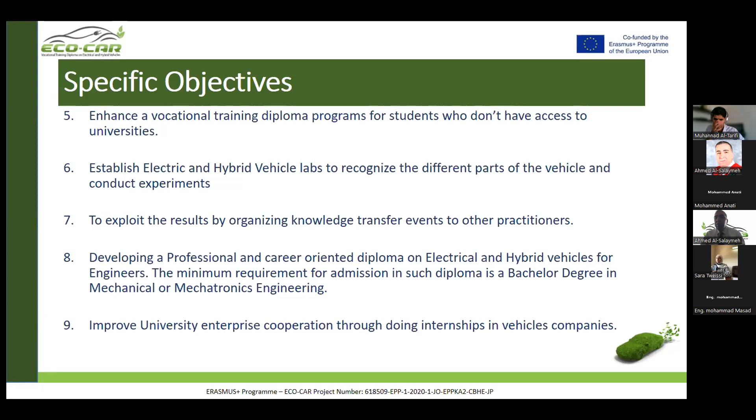In addition, that will also enhance vocational training diploma programs, especially for the students who do not have access to enter the university, which is diploma al-mihani. Also, we will exploit the results by organizing many workshops. This is knowledge transfer, and we'll also improve university-enterprise cooperation through many internships in electric car companies.

Some indicators: I think that this summer we'll have 8 diplomas established at 8 universities in Jordan, courses integrated in the study programs, and many workshops conducted. Also we'll receive feedback from the students, and a regional and international network will be established.

Next month we'll have the first training workshop in Europe within the capacity building, and the students who enroll in the program will also have the chance to get training in Europe. We'll also have the training centers, the lab at each university, and we have a website. Currently we are working on the course material, and an e-learning platform will be launched soon.

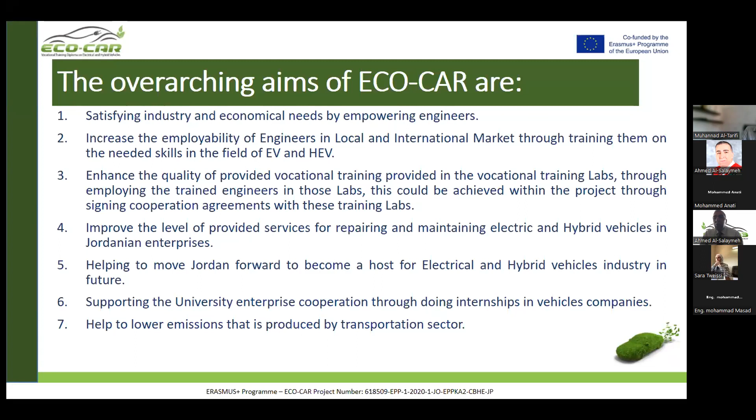These are some objectives that we want in general: to enhance the teaching, the capacities, the programs in the field of electric and hybrid cars. This will also have environmental dimensions, since it will lower emissions and aim to reduce greenhouse gas emissions, and this will help Jordan to become a hub for electric and hybrid car factories and industry.

About what we have till now: some universities will have a professional diploma, others will have a vocational diploma, and some universities, especially Al-Balqa and Al-Hussein or Al-Tafile, will have a community college diploma. We have the different work packages, such as the network, and the first one was establishing university-enterprise cooperation. We already started with this work package, and this will continue till the end of the project.

And now we already have the network, with about 75 registered members from Jordan and about 13 registered members from Europe. This is the template to join the ECO-CAR network. Any company can join this network. Before we prepared the curriculum or the courses, we did a baseline study with many surveys for students, staff, and stakeholders, and we analyzed them, and the results were the base for our curriculum.

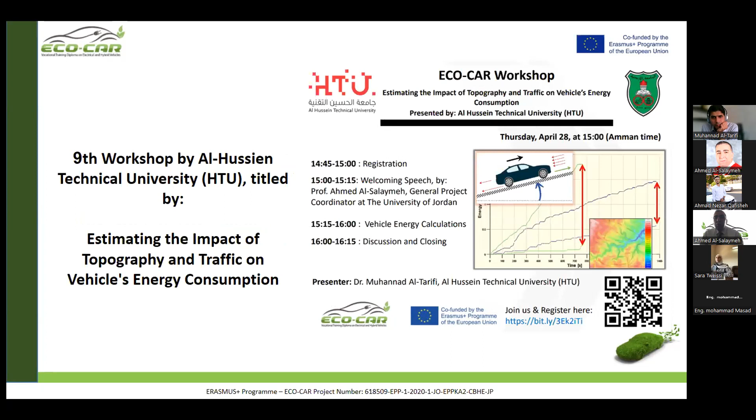And today we have this workshop from Al-Hussein Technical University about the impact of topography and traffic on vehicles' energy consumption. We hope that next month other universities will give more training workshops. About the labs, soon each university will have electric and hybrid labs, and hopefully there will be an official opening for these labs.

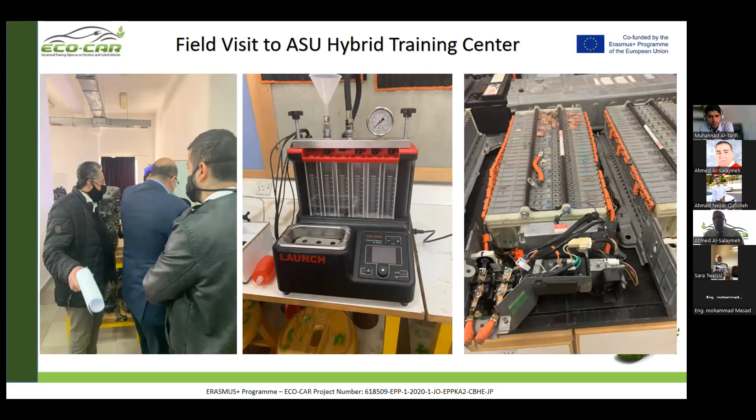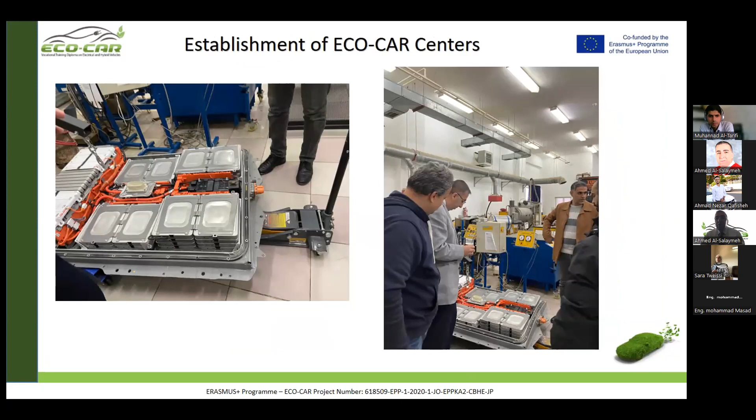This is an example of the electric and hybrid labs available at Applied Science University, from our visit. This is also an example of our visits to electric companies that have electric cars in Jordan. We try to strengthen this cooperation with the electric companies.

Yeah, this is about the new devices which already started to arrive to the universities, and we hope that within 2 months all equipment will be available in Jordanian universities. And currently we are preparing the courses. The course material will be ready by the end of this month or next month.

And yeah, we'll have the platform to host this course material. We also want to have a certain quality in the projects, and therefore we'll have continuous monitoring for the implementation of the projects. Yeah, dissemination is very important, and therefore we have many activities within dissemination.

We'll have newsletters; if you have your email with us, you will receive the newsletter about the projects, and the website and other social media. For the management, the project is coordinated by the University of Jordan. This is the project website, you can visit it. This is also the Facebook page, and this is the YouTube channel where we have some videos about the projects. So this is in brief about the ECO-CAR projects.

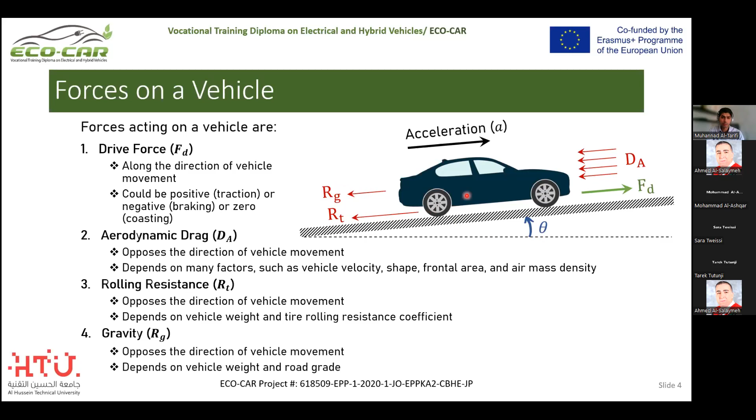What affects this equation is everything related to all of those parameters. The gravitational acceleration is constant. Now the mass or the weight of the vehicle will make a huge effect. The drive cycle, which is the velocity, will make a huge effect, and all of these things related to the aerodynamic drag will affect it as well. These are different things that car manufacturers compete to reduce, so they can increase the energy efficiency for a specific cycle.

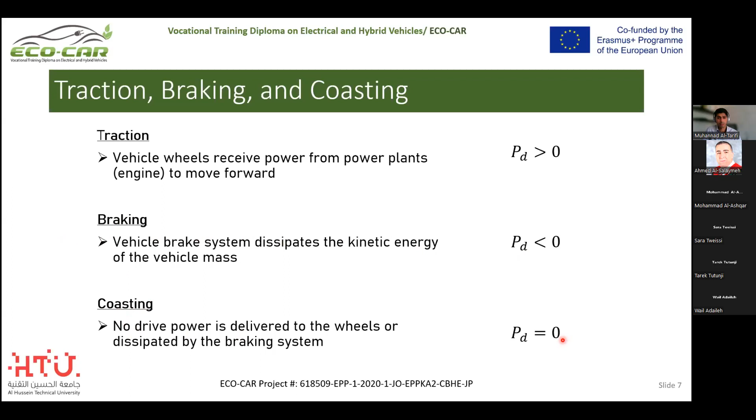And if from that equation the power is negative, then we are applying the brake, which means that we are reducing the acceleration of the vehicle by absorbing some of the kinetic energy through the brakes, which mostly goes to heat for conventional vehicles. And coasting means that the power is zero. We are just not pressing anything on the acceleration pedal.

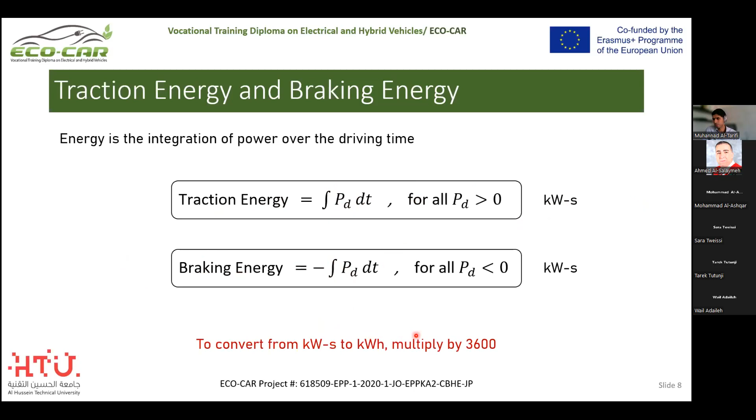The energy is the integration of the power. So in the first case, we integrate the traction power and get the traction energy, positive. If the driving power is negative, we integrate it and multiply it by another negative, so we end up with a braking energy that is positive. We know the flow of each energy in kilowatt seconds. So if we want to transfer it to kilowatt hours, we just divide it by 3600. We'll end up with kilowatt hours.

Now, for the computational modeling, I prefer MATLAB myself, but you can do it anywhere you want to solve that differential equation. I also like to solve it numerically rather than analytically, so I'm using vectors for that. The model is using two inputs. The vehicle specifications related to mass, tire resistance, aerodynamic drag coefficient, and the frontal area of the vehicle. These are inputs from the car manufacturer. You can search that in the spreadsheets from the manufacturer or from people who research that.

And then you have velocity versus time, which we call a drive cycle. It's either standardized or measured. Everyone who goes on a trip from point A to point B has his own unique drive cycle. So that will be the input to the system. We compute the driving power. If the driving power is positive, we proceed and compute the traction energy. And if at a specific point the driving power is negative, we calculate braking energy.

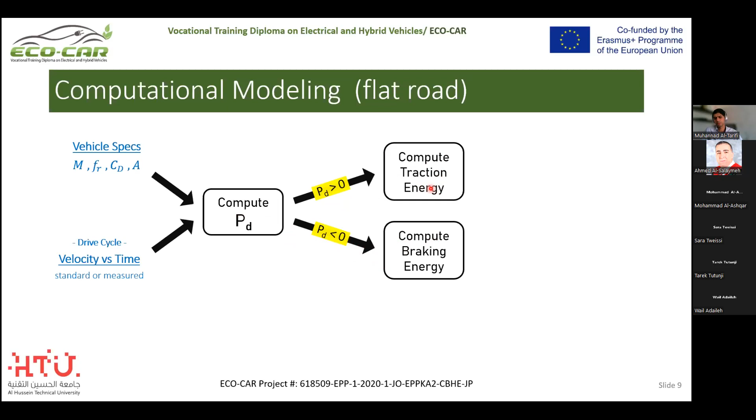Of course, you accumulate that. For every step, you accumulate the traction energy and the braking energy as well. After the cycle ends, you end up with a total traction energy, which is the last point, and a total braking energy, in kilowatt hours. I will keep that unit throughout the presentation. That gives you the total energy, maybe the difference between them, or only the traction energy. The traction energy is something we consume anyway. The braking energy might be lost if you don't have regenerative braking, like in hybrid and electric vehicles. But in conventional vehicles, we lose it as heat.

For fair assessment, we calculate that per kilometer. So we integrate the velocity to get the overall travel distance, and divide the consumed energy, either the traction energy or the traction energy minus the braking energy, by the travel distance. We end up with kilowatt hours per kilometer, and that's a universal unit that car manufacturers publish to brag about their efficiencies.

So to test that, we applied that to a very well-known cycle, the Worldwide Harmonized Light Vehicle Test Procedure. It's basically just speed versus time, and it's standardized. So people, when they test their cars, usually they use the dynamometers to apply this speed and then measure the efficiency out of that. I'm doing everything computationally, so I'm not doing anything practical here, but I'm trying to compare with practical results at the end.

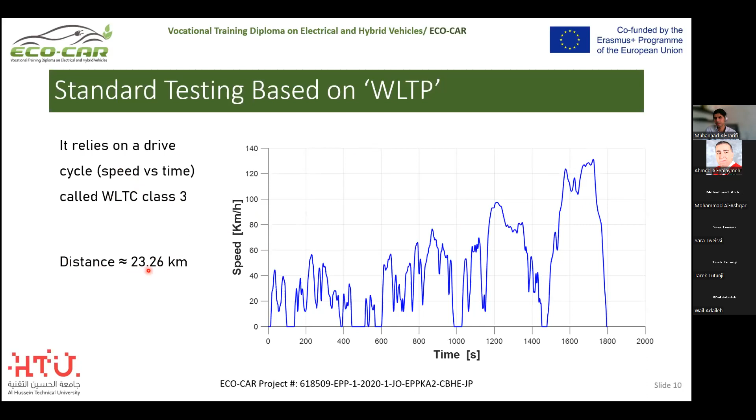Now, if you calculate the force, calculate the power, integrate, and find the energies, the traction energy and the braking energy, you end up with these curves. What we care about here is the last point. By the way, I used the Toyota Corolla 2021 parameters, took them from the internet. And then you'll find that the traction energy is 3.4. Of course, I chose the conventional vehicle, so I will not have any use for the braking energy to save something back somewhere.

So easily you can find that energy consumption will be the final consumed traction energy divided by the travel distance, which is 0.146 kilowatt hours per kilometer, which is fantastic when you calculate that. But that is not the real energy that you consume. That's only the kinetic energy that could reach the road. Actually, on the way to reach the road, you lose about 75%. You deliver only 25% to the road. So this is only 25% of the actual energy that is consumed.

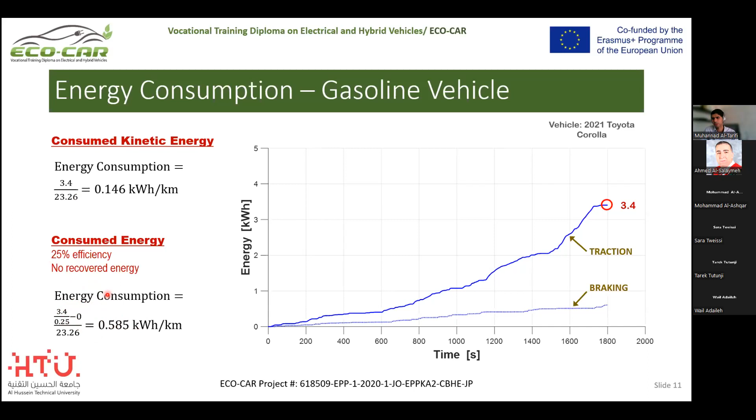So we don't have any recovered energy, as I said, and car efficiency itself, on average, they always publish it as 15 to 35%. The average is 25%. So you divide by 25% to see what energy you apply before the engine, before everything. So you'll end up with 0.585, let's say 0.6 kilowatt hours per kilometer. And that's what makes the conventional vehicles a little bit less efficient than electric vehicles.

So if you calculate based on traction energy, assuming you don't have any regen in braking, you'll end up with 0.168 kilowatt hour per kilometer, which is actually higher consumption than the Toyota Corolla, purely due to mass. Well, there is some difference also in the aerodynamic drag coefficient as well, in the favor of Tesla, but Tesla is way heavier. So that's why it will consume more energy.

And then the difference happens when you actually trace back to the battery. Actually, you don't lose much going from the battery to the road. The average is 90%. It could be lower, it could be higher. I took the average, so 90% efficiency. So we divide the traction energy by 0.9 to get what energy actually left the battery.

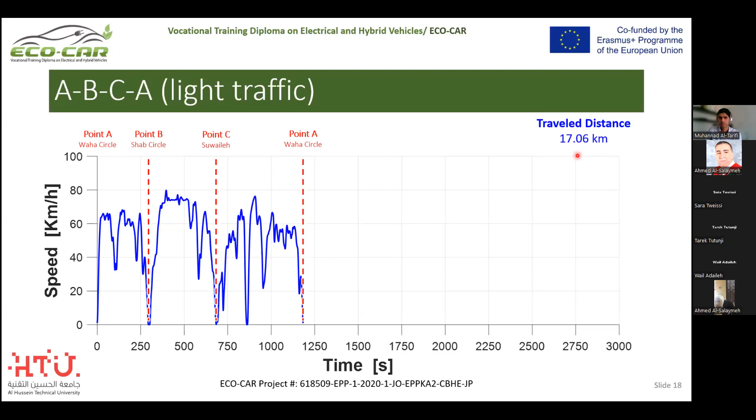Okay, the travel distance for that cycle is 17.06 kilometers. Applying that to the computational model, you have 2.4 kilowatt hour consumed as traction energy and 0.46 kilowatt hour consumed as braking energy.

You can see that braking energy is less than 20% of the traction energy as a percentage, which means it's light traffic. Applying the same equation with 90% drivetrain efficiency and 70% of braking energy recovered, you end up with this energy efficiency number. I'm using the same numbers as Tesla, though I didn't drive a Tesla, I used my own car, but the drive cycle applies. When applied to Tesla computationally, you get 0.14 kilowatt-hours per kilometer, which is actually lower than the EPA results. Again, this is very light traffic.

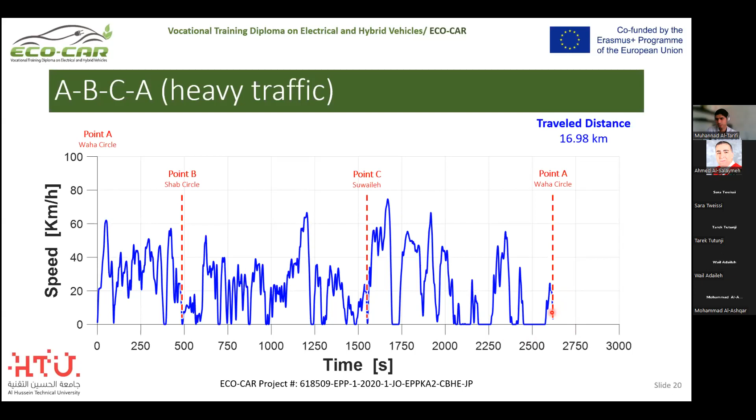Now, if I did the same study with the same points A, B, C, A, but during peak hours, this changes. I have point A, point B, point C, point A again. The average speed is below 40, actually even below 30, not like the other case where the average speed was about 45 to 50. This one is about 30 or less, even though these are the same paths, same points, same driver, me. So you can see I took way more time, actually twice or 2.5 times the time it took with light traffic.

Now there's a major point here: you don't really recover too much braking energy at very low speeds. So I'll be generous and give 50% instead of 70% for the braking energy recovered. That assumption of 70% is wrong here, even though the result is higher than the 0.14 we got with light traffic, it's still even higher than that.

So just by changing the recovered braking energy percentage to 50%, you end up with 0.16. Comparing 0.16 to 0.14 or 0.145 or whatever, you get about 10 to 15% increase in energy consumption overall due to traffic. So that's the conclusion: heavy traffic can contribute to an increase in energy consumption of up to 10 to 15%.

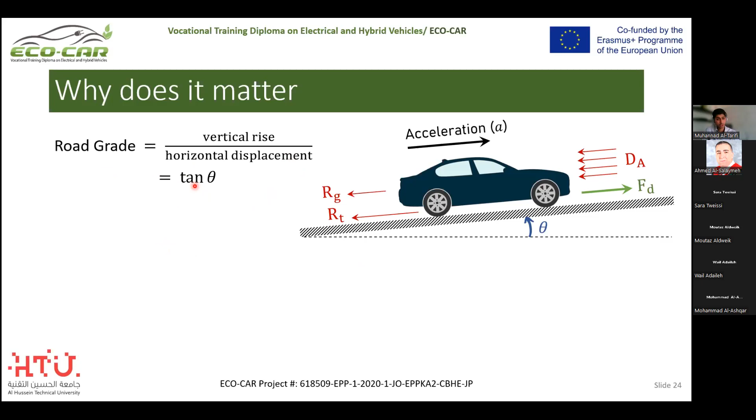Now things will change here because I'm actually putting road grade within my study. Road grade is usually defined as tan theta, but at low road angles, tan theta is approximately equal to theta, which is also approximately equal to sine theta, within about 1-2% maximum error.

This is what I was talking about—we have a term for the gravity effect. The gravity effect is related to the acceleration of gravity, the mass, and of course the road grade. So now I'm including that in my studies.

Probably I should make some animations here, but okay—I'm doing a comparative study to see the effect of positive grades and negative grades compared to flat roads. Positive grade means inclined upwards, theta is positive, which you can also hear referred to as rising roads or ascent, the ascending road.

The other way around, negative road can also be represented as an inclined road, or falling road, or descent. The cycle I'm applying everything to is the FTP 75, and the blue here represents the flat road, 0% grade, so theta is tan inverse of 0, which is 0. That's the flat road, which we studied before, and it was 0.147 kilowatt hour per kilometer, the energy consumption based on a Tesla car and that drive cycle.

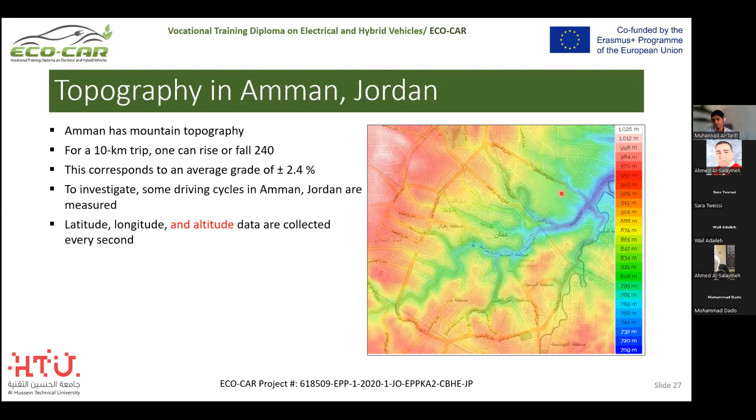So I collected some driving cycles using the same app. Latitude, longitude, and altitude data are collected each second. And now we have two cycles: the speed cycles, which I showed before, and now the grade cycles.

To avoid non-realistic scenarios, you can't just go from point A to point B and say you saved energy. You have to go back to the same point, same altitude. Whatever rise and fall happens within the way is within the way, but the starting point and last point should have the same altitude. I chose to have them be the same point, but for fair comparison or study of the effect of road grade, you have to start and finish with the same altitude.

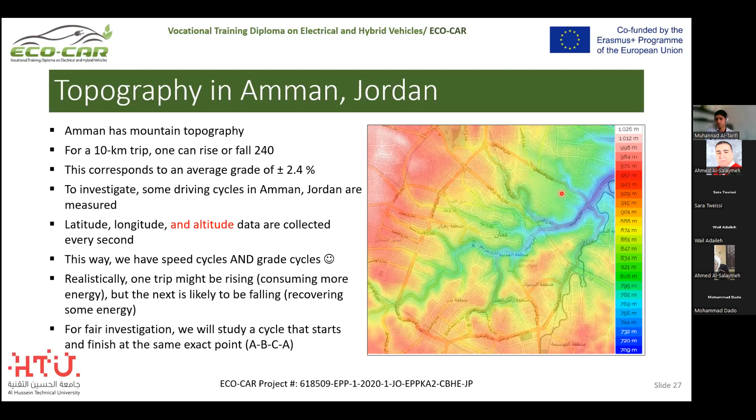I use the same trips. I purposefully did these testings for A, B, C, and back to A, with the idea that point A to point A through that cycle would be fair enough for road grade investigation as well. For the light traffic case, remember we have two cases. The road grade was going up and down, up and down. The last one here was positive. Sweileh is somewhere here, I think.

So the average - I'm not showing RMS values, I'm actually showing absolute values of grade, but I'm then calculating the RMS value of it. The grade is varying. It reaches sometimes above 3% or 4%, sometimes less than 2%, minus 2%, most of the time in between.

Within the computational model, the positive effect will be totally different than the negative effect. To understand how much this variation means, I'm showing an RMS value of about 2.15% for that trip. The energy consumption calculation, based on 90% drivetrain efficiency and 70% recovered from braking energy, gives about 0.174 kilowatt hour per kilometer, which is about a 20% increase compared to the flat road. So it does affect consumption even if you start and finish with the same altitude.

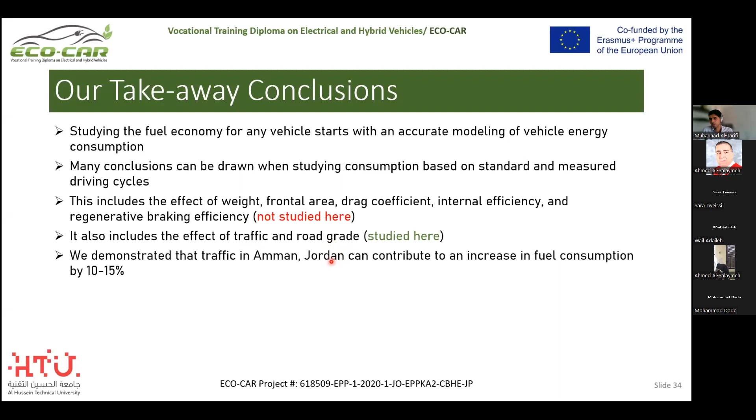All of this is not studied here, but you can actually include them in the computational model and do the comparative studies. In this study, we did see the effect of traffic, which affects the drive cycle on a flat road, and then road grade, which shows the effect specifically for Amman, Jordan with realistic or measured results. We demonstrated that traffic can contribute up to a 10 to 15% increase in energy consumption, and road grade might contribute a similar number, 10 to about 20% energy consumption.

More data can be collected. Accuracy of collecting the data might be an important factor here as well, because GPS data are not always stable, especially for small distances, collecting data every 1 second and all that. Now, if you want to go to another city, you can make a different study. You collect new data for that city because the habit of driving in that city, the topography of that city, and all of that are different. So you can repeat that.

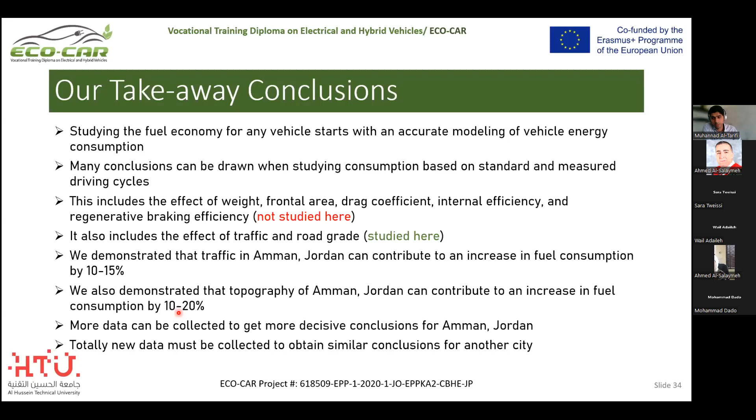Conclusions might end up being about similar, but for accurate conclusions, especially if we are talking about transportation systems, let's say buses, let's say trucks, that might be a big deal. That has to be done for every city by itself.

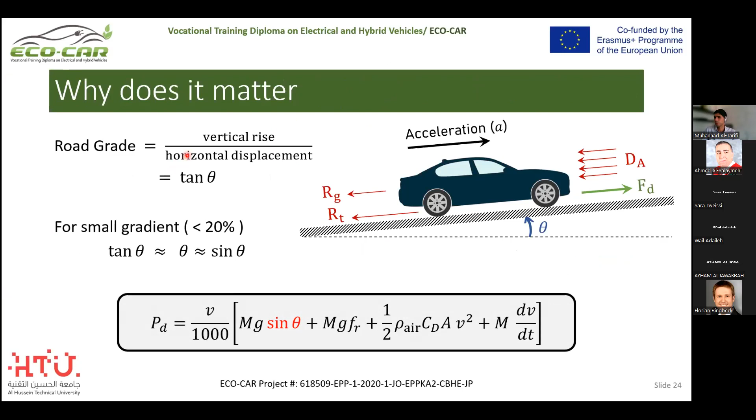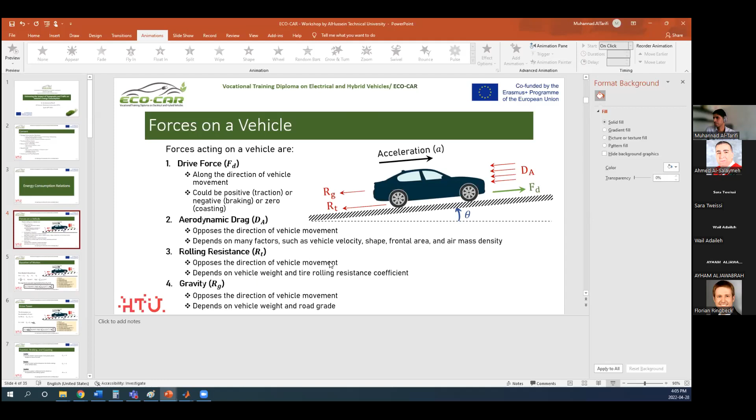Okay, that's good. The first question is regarding the tire rolling resistance. You use a constant friction factor for the rolling resistance. As you know, there are other tire models, non-linear models like the brush tire model or the magic formula. Did you have the chance to check these non-linear models and see the effect in your model? Does it affect the result much or not? Yeah, you are right. It's a constant. The effect of the rolling resistance will be huge, especially for light traffic, because it is a constant applied all over, regardless of the speed. So I agree with you, but I didn't do that study.

I see. The second question is also about the rolling resistance, just to make sure you are focusing on low grades, because I was expecting to see this term multiplied by cosine theta. Do you assume it's 1 because you have low grades? Yes. I'm not including the grade in the tire resistance term. Okay.

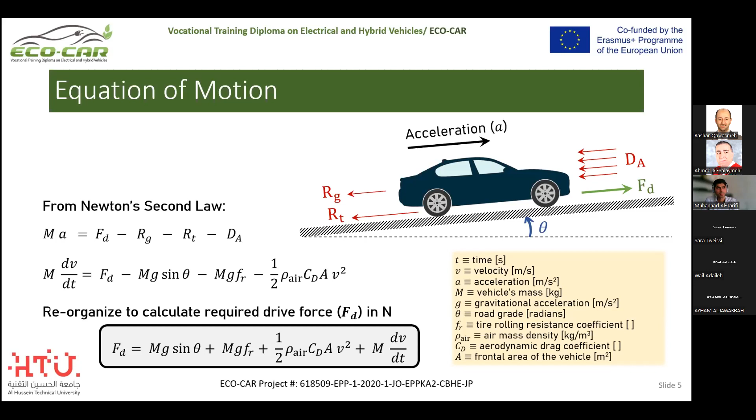It's nice that you consider taking the grade or the road grade as one of the parameters. But my question was, why just the plus and minus 2% grade levels? Why didn't you consider more grade levels? And my second question, you mentioned something about small angles, theta, and the sine theta. Did you do this in order to get a linearized model?

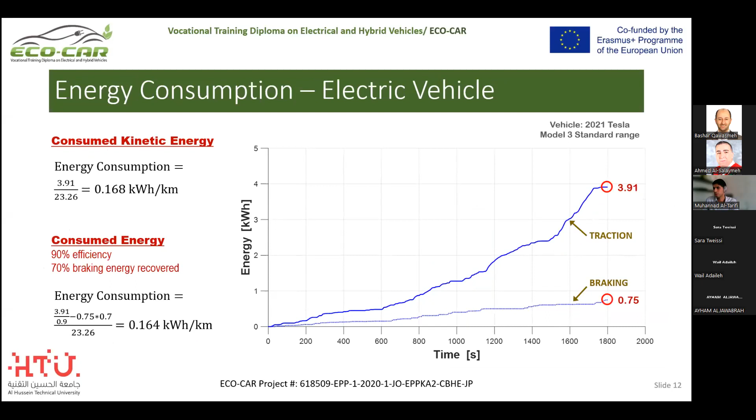Okay, well, answering the first question, I didn't consider it just because my purpose was just to demonstrate that the effect of the grade, even for small grades, is huge. The trend is there, so a higher grade will mean huge energy consumption in the rising case, and probably zero energy consumption, maybe only collecting braking energy, if it is falling all the time.

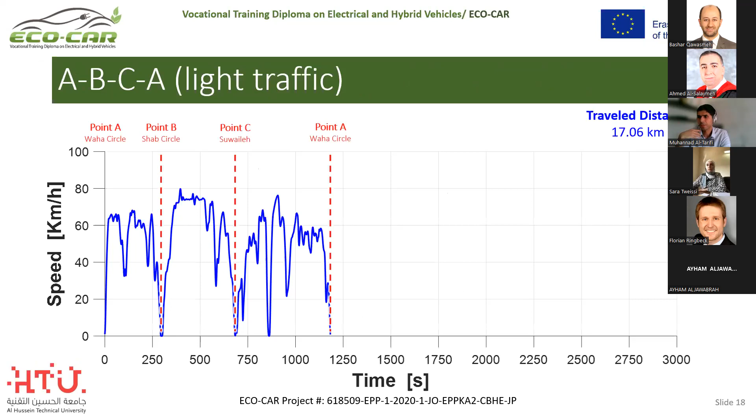Like if you go to the Dead Sea, for example, you collect lots of power for a big section of the trip. But coming back will be just different. So the trend is there.

Why the approximation? No, it's not because of linearization. At the end of the day, I'm actually collecting all the data and calculating theta at each point, or between every 2 points. But the definition of road grade sometimes differs. It's universally known as tan theta, but some people approximate it as theta.

Because the term in the force equation is sine theta. I just wanted to give an idea that 2% will be 2%, which will be 2% again in the equation. That's what I wanted to say, but not for my models. I didn't linearize anything at the end of the day.

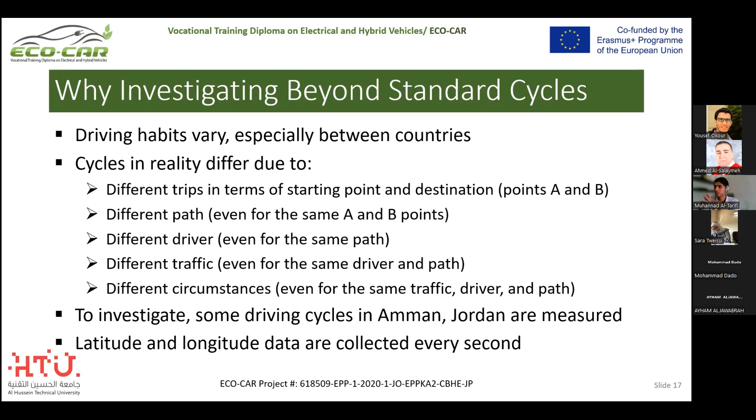So the person has to go through a path, for example, from point A to point B, and then a similar path somewhere else without traffic lights, and then see the effect of traffic lights. Obviously, increasing the traffic lights means more braking and then more acceleration afterwards, which, regardless of how much you collect from regenerative braking, you lose. So obviously more traffic lights means more energy consumption. But again, my study didn't have that element as a focus point.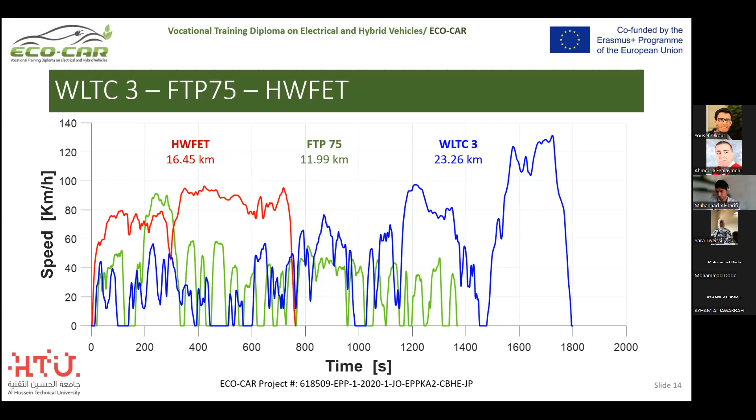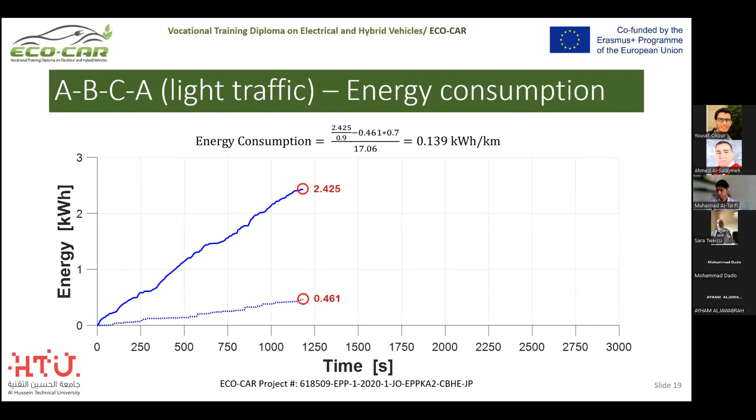Okay. One more small question. In the grade of the road itself, you assumed a constant grade, but actually in real life, you have horizontal segments, then steep falling, then steep rising. So it is not very simple to consider it as a constant. You have to combine different slopes and also flat segments.

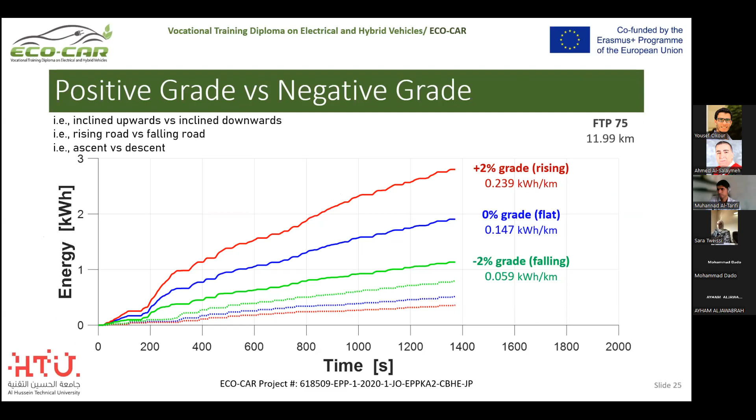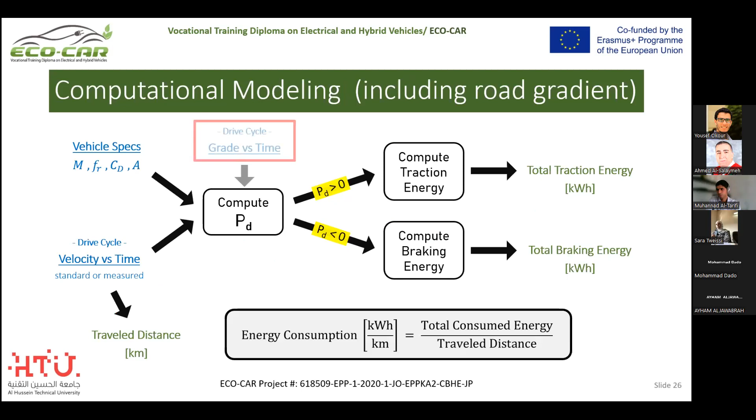Yes, that's what I did. When I first showed these results as a constant rise or a constant fall, I was just making the point that the effect of road grade is huge, but then when I proceeded to collect practical sense about it, I assumed a realistic path, which had both. So I had positive grade in my drive cycle and then negative grade in my drive cycle as well. So even if the starting point and the last point had the same altitude, I still had the effect of road grade.

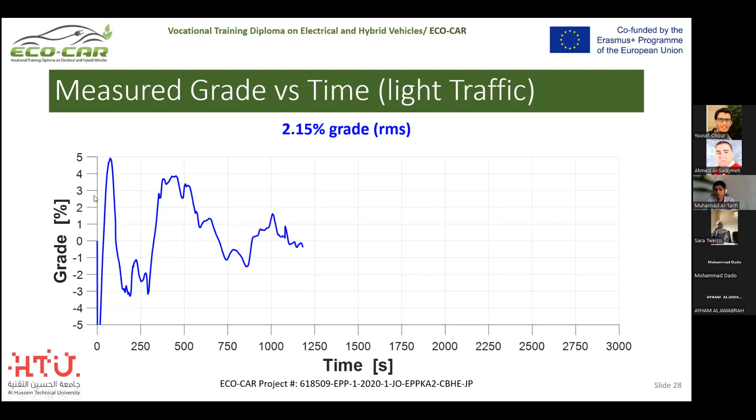So if I start from point A to point B and finish up with the same altitude, it might come to the mind of somebody that you didn't end up with an overall reduction or increase of altitude, so your energy consumption calculations have to be the same. And that's not the case. You didn't change altitude from point A to point B, you changed in between, and still the effect of the road grade showed to be about 10 to 20% or 10 to 15% increase in energy consumption. So it was included in this study.